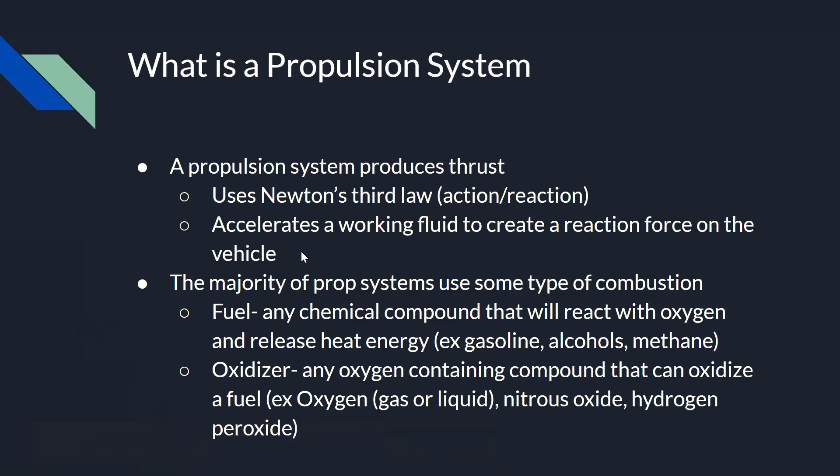So there are a few different types of propulsion systems in aerospace. You have high-powered rocket engines, which we'll talk more in depth, and pretty much what this course is going to focus on. So those are liquid-powered, hybrid-powered, and solid-powered, and we'll cover those more in depth in a few slides. And then you have low-powered rocket engines.

So those are like cold gas thrusters, ion engines. Is that a cool picture of an ion engine? I think that is. Yeah, that's one piece. And then cold gas thrusters, pretty much, there's no combustion. They just use compressed gas, and there's your action reaction as it releases the cold gas.

You have gas turbines, like here on the right. By the way, I ask this like every meeting, but can people see my mouse? Yes. Yes. All right, cool.

So you have gas turbines, like this picture over on the right here. There's a few different types of those: turbojet, turbofan, turboprop. We won't really get into that much, but basically a turbojet is what you see here. A turbofan is when you have a turbojet powering a giant fan. Turbofans are what's on most commercial aircraft. And then you have turboprop, which is pretty much a turbojet powering a propeller.

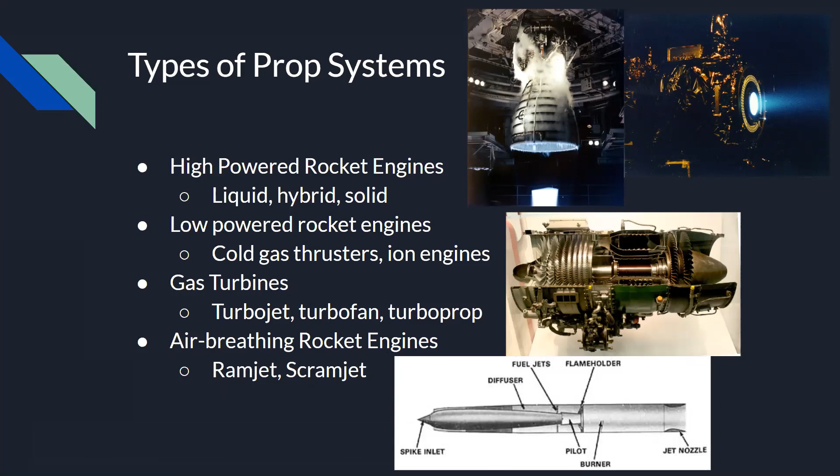All right, so solid rocket motors, pretty much what most hobby rockets use. So basically you have a solid fuel and a solid oxidizer formed into a solid fuel grain. This is pretty much just like the common Estes motors. So these generally have low efficiency, but they also have a very low inert mass. Almost none at all if you are considering these Estes motors. It's just a little cardboard casing around it, and the rest of it is pretty much fuel and oxidizer. So these are best used for very small rockets since they don't have much other mass associated with them.

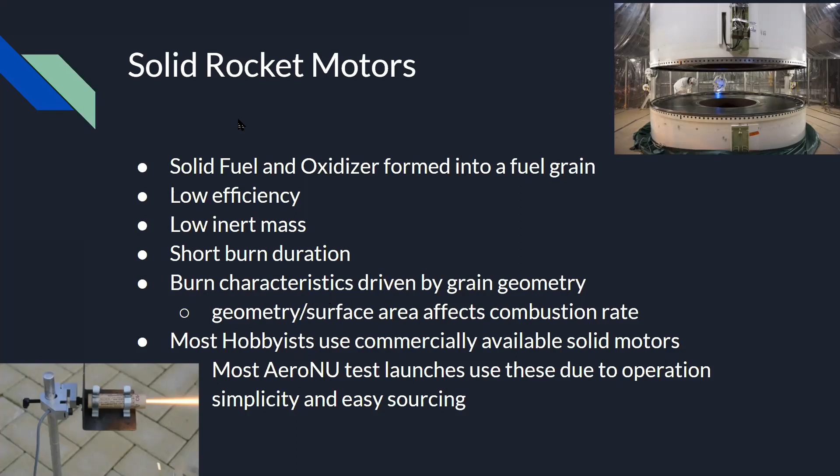And then the burn characteristics are kind of fixed by the grain geometry. I'm not really going to get into that. There's a lot there, so if anyone is interested in solid motors and wants to start that, by all means. There are some schools like MIT that do their own custom solid motors, but that's pretty dangerous and not something this club has ever looked into doing. But the majority of our rockets in the club are actually launched on commercially bought solid motors. So just be aware of solid motors, they're a thing.

So liquid motors, which is pretty much what this course is going to focus on. Basically, liquid engines combust a liquid fuel and a liquid oxidizer. Sometimes, in the case of one of our old engines, it's actually a gaseous oxidizer. So they just combust fluid, liquid or gas propellants in a combustion chamber and spew it out a nozzle to make thrust. These fuel combinations are more efficient at large scales.

There's a lot more inert mass than solid motors. So you have the engine itself, and then you have the tanks to store all of the propellants and stuff, and the whole feed system of tubing. And on larger, orbital scale rockets, you'll have turbo pumps to drive the fuels. But if you scale that up, liquid engines have a much higher thrust to propellant mass used. So that's generally why they're used on larger scale rockets. You also have a lot more control over the thrust and burn duration that you get out of the rocket engine. Some rocket engines are even throttleable, not the ones that we build.

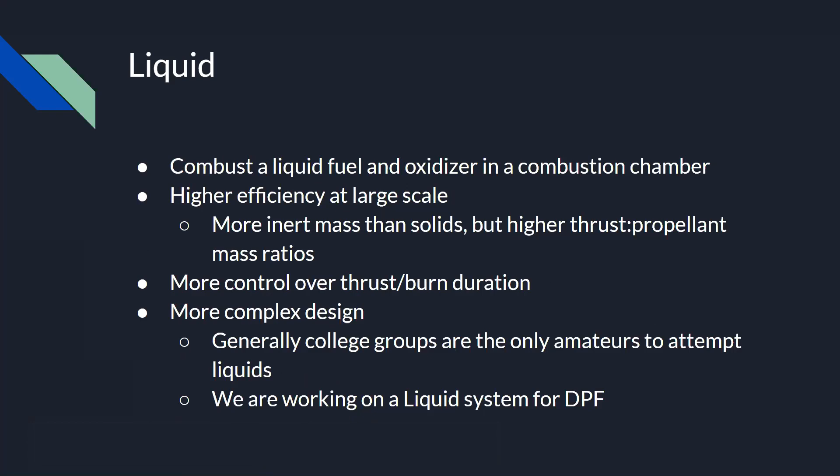Actually, before I go on, are there any questions? All right.

So the last type of high-powered rocket engine is a hybrid engine. Basically, you have a solid fuel grain and a liquid or gaseous oxidizer. I don't think I've ever seen one that has a solid oxidizer and a liquid or gaseous fuel, but who knows, could be possible. Usually for a hybrid, the solid fuel grain is something like, I think some kind of plastic will work for this since that's a hydrocarbon. And basically you flow your oxidizer over it and that will combust on the inside of the fuel grain and come out the nozzle, just like in a solid or liquid.

So in theory, hybrids exist because they have the benefit of being efficient like a liquid rocket engine, but less complex than a full liquid engine because you only have to deal with one propellant tank, and the fuel grain can actually work as the combustion chamber. But in practice, you kind of just get the worst of both worlds. It ends up being less efficient than a liquid, but heavier than the equivalent solid. So hybrids aren't generally used in commercial rocketry, but there are quite a few hobbyists who use it as a step between solids and liquids.

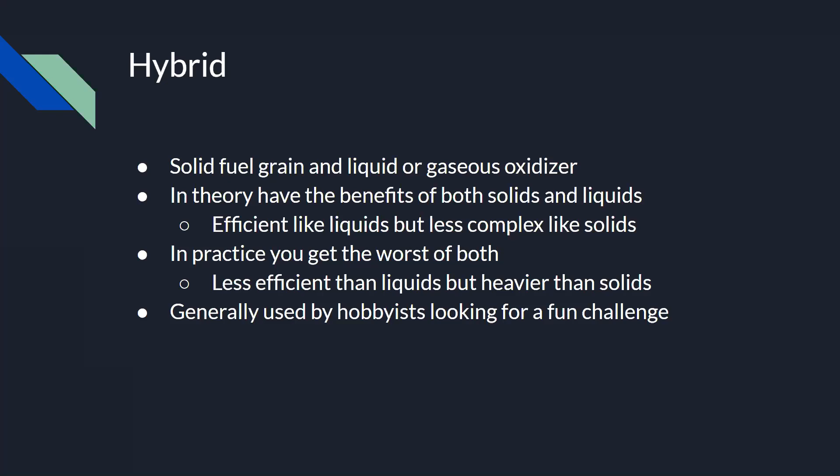Yep. Also, again, I've kind of caught myself using some of the technical jargon. So propellants basically refer to both fuel and oxidizer. Both of those are one of your propellants. I think that's all the stuff I've used. Again, if I use a word and you guys don't know what it means, please interrupt me or put it in the chat.

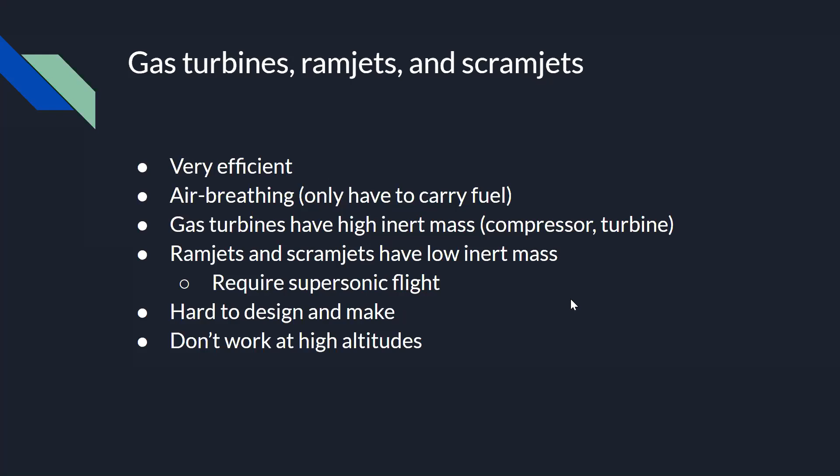Okay, so as I said before, this course is mostly going to focus on liquid engines. So we're going to go over a few of the major components of liquid engines and kind of a basic overview of how they work. So there are three main parts to a liquid rocket engine. You have the feed system and injector, the combustion chamber, and the rocket nozzle.

Also, Arun, I don't know what time it is. It's not showing on my computer because I'm in full screen mode. So if you just want to cut me off at 9, I don't want to go over. You're good, it's 8:30. Oh, cool. We have plenty of time.

Yeah, so those are the 3 main parts. If you see in this diagram here, all of these tanks labeled helium, LOX. LOX is liquid oxygen. You'll commonly see that referred to in a lot of the stuff, especially with DPF, because we're using liquid oxygen as our oxidizer. And then the helium tank. Another thing is if there's an L in front of something, that generally means it's a cryogenic liquid. Did you say helium tank? Yeah, what is that for? Helium.

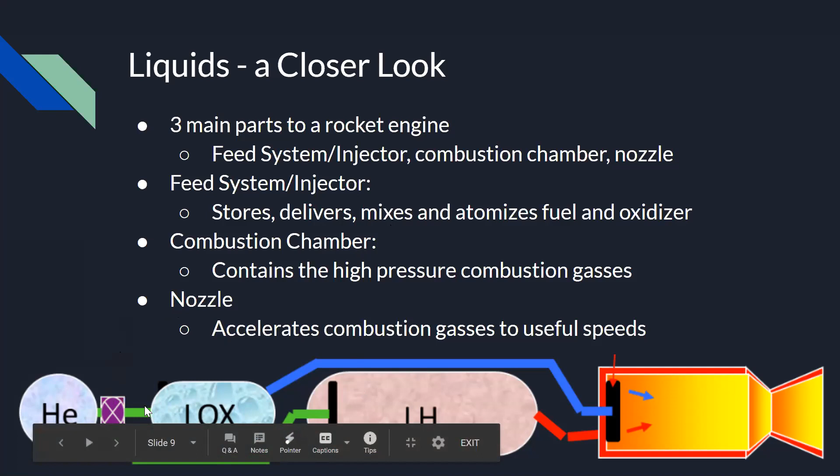Okay, thanks. The regulator will make sure it's not equal, right? It probably won't have equal pressure for the top of the liquid oxygen tank as the top of the liquid hydrogen tank, I assume. Yeah, well, it's a little bit complicated. In our system on the DPF rocket, we actually have two regulators. It pretty much just determines the pressure between the high pressure helium and whatever is on your low pressure side. For us, we have two regulators because you're right, the pressures in each of these tanks are different. But there are some, like the Methalox engine, which we'll talk about in a minute, they somehow tried to use the same pressure in each tank. But that's a headache.

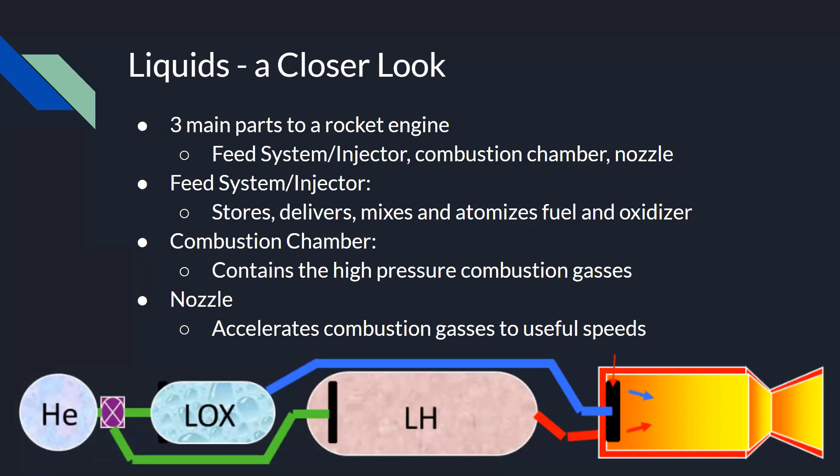All right, if there are no more questions. Oh, cool. I already covered the first two bullet points and that other bullet point. So as I said, the entire rocket engine's basic function is you take a fuel and an oxidizer and efficiently combust it and efficiently accelerate it to supersonic speeds to generate thrust. And the basic principle of how thrust is generated is conservation of momentum. If everyone remembers from physics, mass times velocity. So here the engine is basically throwing a bunch of gas particles, which have mass, out of the nozzle at very high speeds. So that creates a momentum and a thrust force.

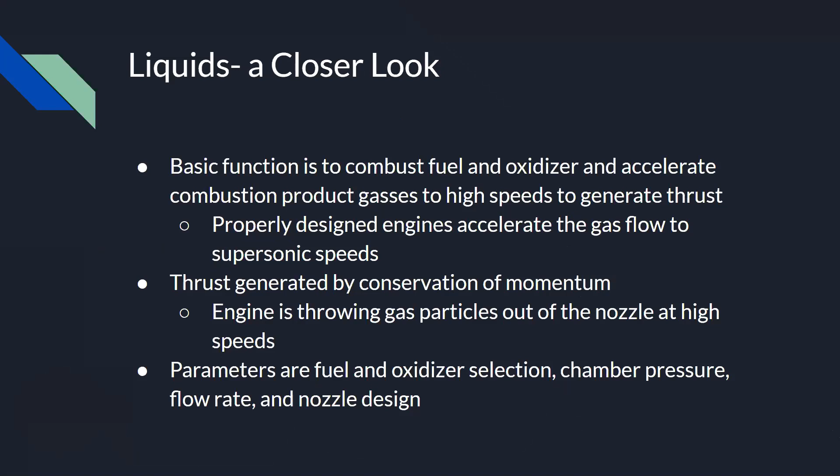And then the parameters of a rocket engine that you can play around with are the fuel and oxidizer selection, chamber pressure, flow rates of your propellants, and the contour and design of the nozzle. Okay, so are there any more questions about either of these slides before we get into what the club has already worked on in the past?

All right. Aaron, how are we doing on time? You're good.

Cool. So in the past, the club has worked on 3 different engines. The first one was the IPA-GOX engine, isopropyl alcohol and gaseous oxygen. The next one was the Methalox engine, liquid methane and liquid oxygen. And the last one, which is being used for the DPF rocket, is Regen, named not after its propellants, but its cooling method. This one is regeneratively cooled, which means it's cooled with its fuel, which is something we'll talk about a lot later in a month or so, all the different cooling methods.

So the IPA-GOX engine, as I said, isopropyl alcohol, gaseous oxygen, 50 pound-force of thrust. Here's a picture of it. Very, very big and chunky. Pretty much just a proof of concept ground test engine that some kids made to start off LRE and explore what they could do. I don't think this engine was ever actually fired successfully. I think there was an issue with ignition, something no one had thought about. They couldn't figure out how to ignite the engine once they had it made. And by then they were already a good amount of the way through the Methalox engine, so nobody bothered to actually hot fire this guy, which is sad.

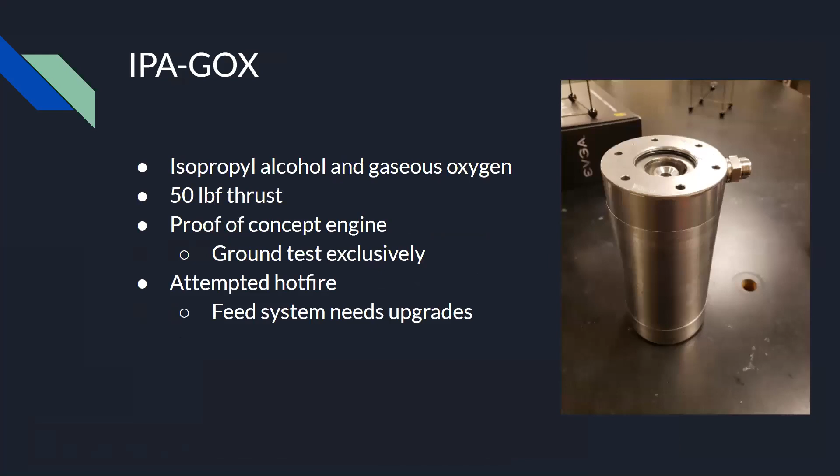In contrast, the IPA/GOX engine, the first little one, just wasn't cooled at all. It just has a large amount of stainless steel in the wall. So it's only made to be fired for about 7 seconds because it's very much a test engine. And the Methalox engine is literally made with a disposable inner wall coating, so it's also limited in its test fire length.

Yeah, this is the first one that, if we have unlimited fuel, in theory could just fire forever. Now, how all that's actually applicable is for what the rest of this semester is going to look like for us. You actually want to kick it over one slide?

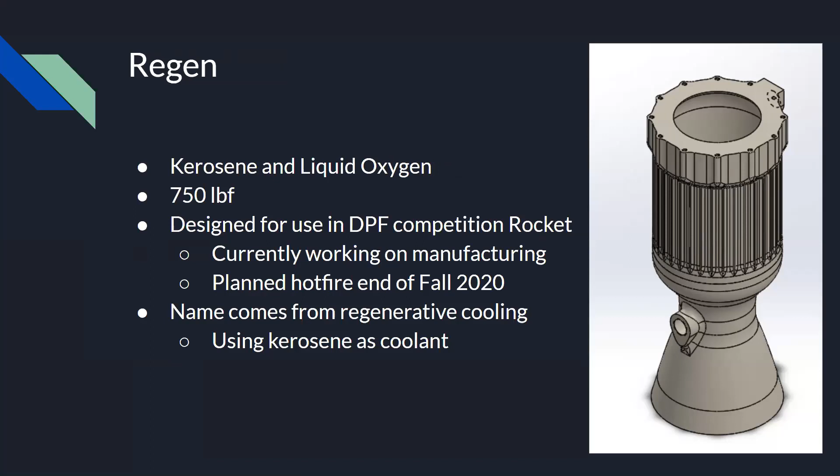And then the Thursday sessions will be working sessions and question and answer times for everyone, because we will be working in small groups, just because doing this alone is kind of difficult. And also we don't have the bandwidth to keep track of 25 engines.

I think there's a slide after this, right? Just a question slide. What happened to the summary slide? The summary slide? I don't know what happened to the summary slide. I never made one. Did you? It skipped a slide between Regen and this. There it is. Oh, whoops. I don't know how that happened. I was wondering. Okay.